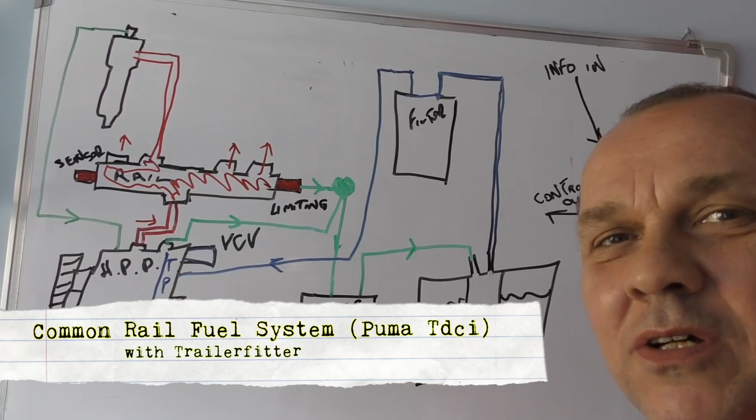This one is about common rail, specifically the Tdci type system used in the Puma engines. There are two different Puma engines, the 2.4 and the 2.2. They have differences, but they're minor.

One has a transfer pump in the high pressure pump, and the other has a fuel pump in the tank. Anyway, what I want to do is explain the common rail more than anything, and we'll introduce the Puma stuff in as we go.

I'm not really familiar with the 2.4 and 2.2, but we've got some in the workshop and we do get problems with them. The major one is this tank pump.

It will come up with a VCV fault, and it won't be that at all. You'll have a lot of shit in the tank pump and it won't be pumping properly. It's just something to remember.

This is not a diagnostics course here. This is just a fuel system overview.

As with the 300 Tdi EDC, it has a brain. As with the TD5, you have information coming in from the engine.

The difference now with common rail is monitoring the exhaust emissions, which monitors the pressure differences in the exhaust, because it wants to know that it has full flow there and it's not blocked up with soot.

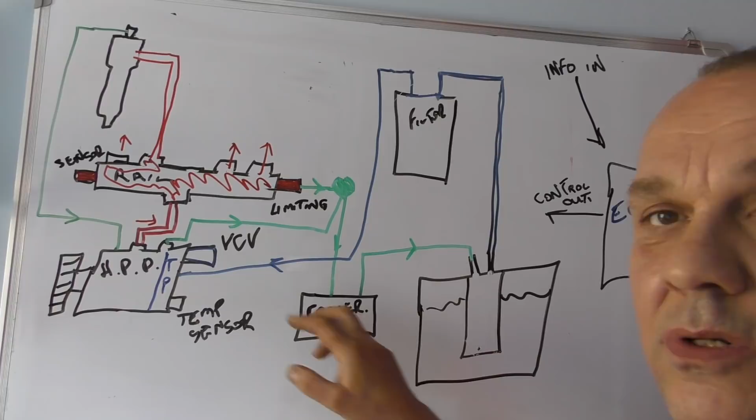What it has in the high pressure pump is a transfer pump, which sucks it all the way through to here. The later 2.2s have a tank pump which pushes diesel through, and it's a lot better.

If you have issues with leakage here, it's sucking, isn't it? So that will cause you a problem, whereas if it's pushing, it will leak and you'll see the leak.

Basically what we have is from tank to filter, and then it goes to the high pressure pump. That's a supply too.

Now what the high pressure pump does, it's not like an injector pump. All it does is provide pressure to a common rail. So we have fuel coming in.

It's controlled by the VCV, which is a volume control valve. You have a temperature sensor here as well, which sends information to the ECU so it can adjust the volume coming into the pump.

Whether it's got a transfer pump or not, it has a leak back. Leak back can also come from the injectors to the pump, out to the common T-piece, to a cooler. We'll get to that in a minute.

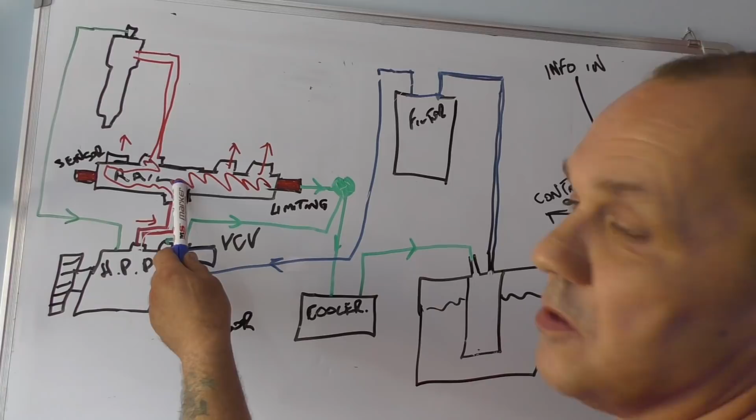So your high pressure pump, HPP, is designed to just deliver pressure to the common rail. Now the common rail, as it says, is a common rail.

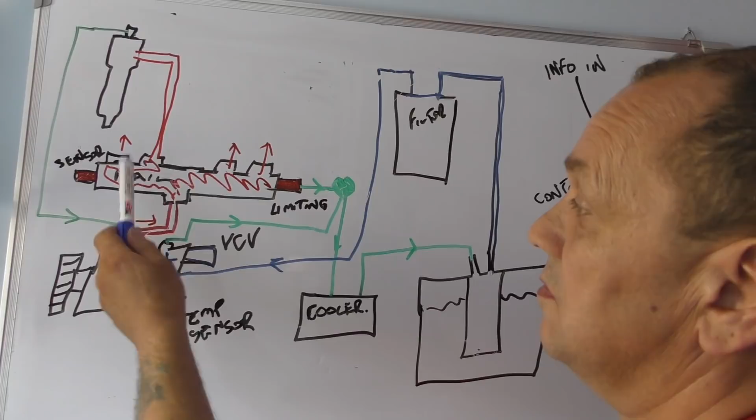That means it will provide constant pressure to four injectors. It has a sensor here, your pressure sensor, which senses what pressure is in the rail, and it also has a limiting valve here.

If the rail pressure is exceeded, as a safety it will blow off and let back. And there's something you should know, if this comes up with a DTC to say that this has blown off, you've got to change it.

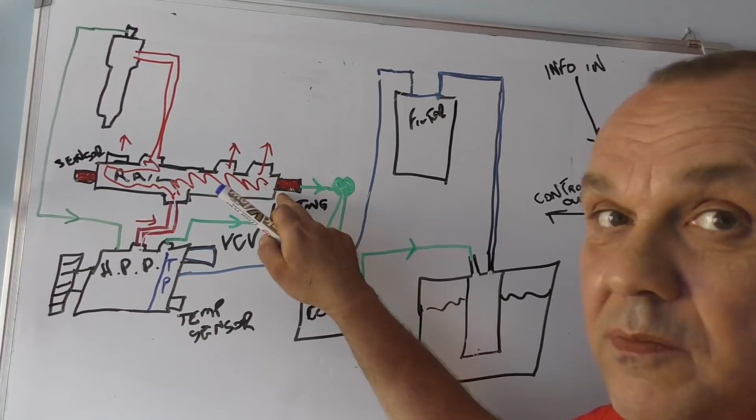According to the manual. I've not had one blow off, nor have I known of one anyway.

So what you have is your high pressure pump converts low pressure diesel into high pressure to the rail and then off to the injectors. Now the rail is a fairly stable pressure.

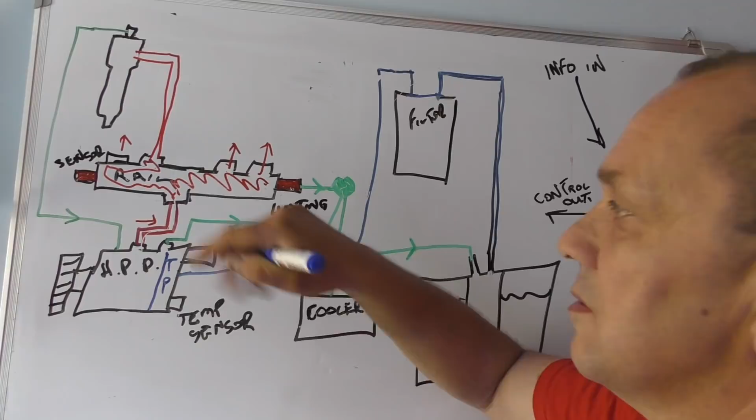The pump's always adjusting its pressure to keep this pressure right. There is quite a bit of difference in pressure depending on the speed you're going. So what it's doing, it'll...

deliver pressure to the injector, and then the injector is controlled, there's a solenoid in here, by the ECM. Now these can fire off very quickly. I think there's five squirts on this one.

You have pre-squirts, you have a main burst, and then you have a post burst, and this is to give you power and to clean up the burn in the bore.

You also have a leak back, which goes back to the high pressure pump on this one. Some don't, they go somewhere else. Leak back should be very minimal, there shouldn't be much there.

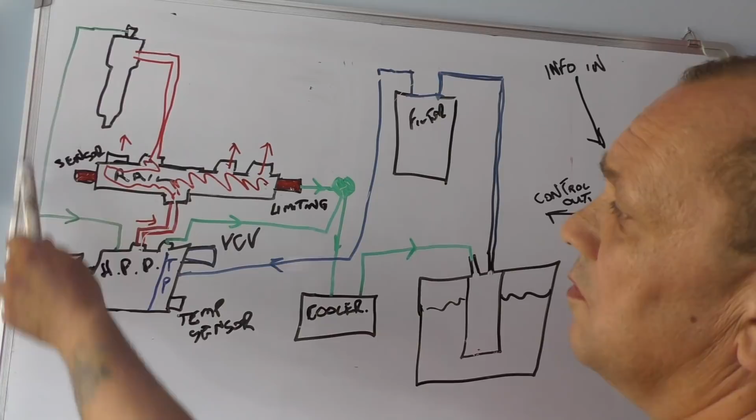Basically what happens in this system after that is the diesel leak back will go to a fuel cooler and then back to the tank.

Basically that's it. That's just the fuel system as it is.

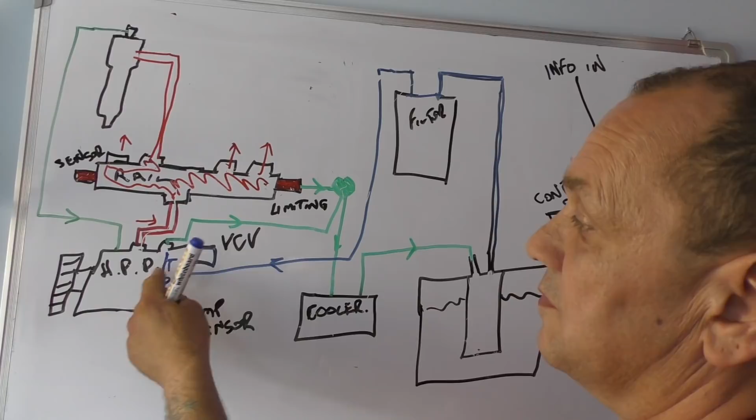The volume control valve, now that is an important element. That is controlling how much volume comes into that pump. The high pressure pump itself is controlled by this via the ECM.

We'll leave it there for now. Obviously that is how it works, and it's that simple. Yeah, it gets more and more complicated when you need to diagnose things.

Alright, what I'll have to do is try and scrounge a Puma from somewhere eventually, to show you how to diagnose this system.

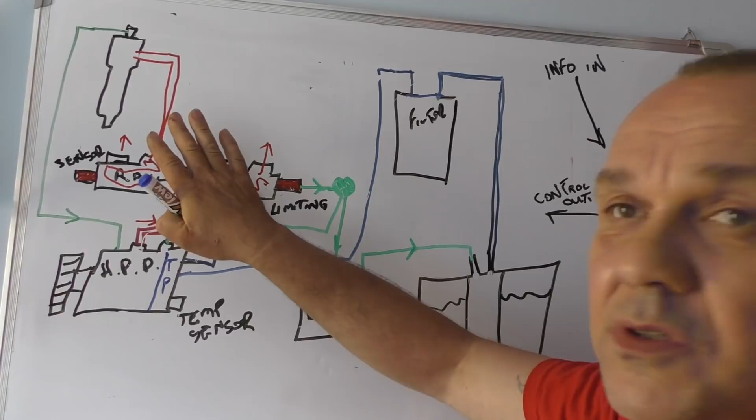On a high pressure system you never crack the injectors off. When the pressure is in the rail, just let it sit for like half an hour. Once you've undone these unions, the high pressure pipes on the rail, don't use them again because they're one use only. I know people fit them again, but it's not exactly right. They leak, they cause problems, people try to cram them down even more, and then they ruin the olive fittings or the threads on the common rail.

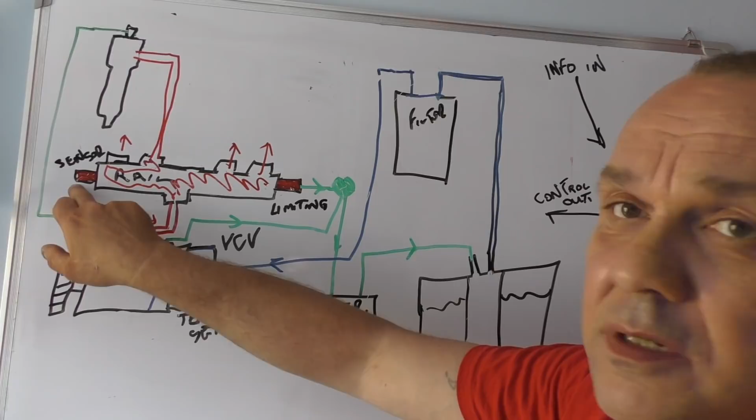This block is cast iron, you see it, it's the rusty bit on the engine, and this will hold extremely high pressures. The sensor senses the pressure and sends it to the ECU, which can then work with the high pressure pump to control the volume going into the common rail. As I said, this is a constant feed to each of the four injectors in this case.

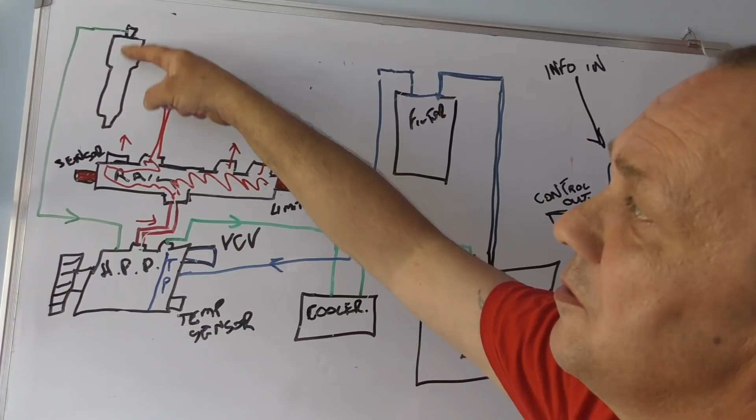The pressure's there, the solenoid drops off and gives it squirts. For instance, with diagnostics, if you have four injectors and one that's leaking off quite dramatically, that'll be the injector that's knackered.

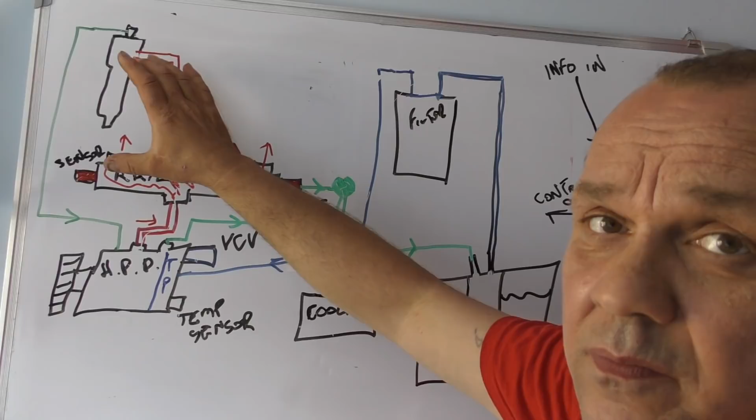These aren't the best. These Delphi ones, they're not brilliant. The later Puma 2.2s have got piezo injectors, they're a little bit better, but they still can fail. You can have more leak back than you really want.

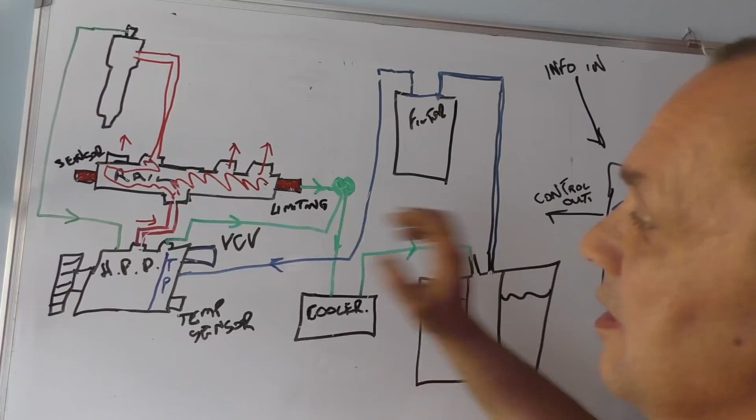What else can I say about this? The diesel coming out of this will be quite warm. You keep it cool, the diesel will come to a certain viscosity. The temperature sensor here is determining, like I said on the EDC type, the quality of fuel coming into this pump. The ECM can then adjust this accordingly and adjust the injection accordingly.

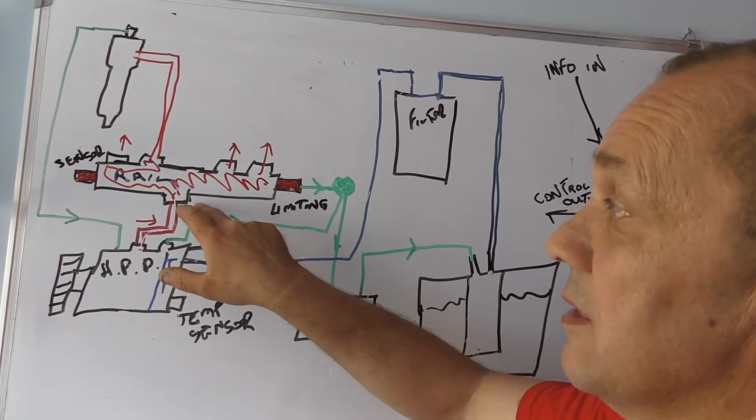These systems, this transit engine, for want of a better word, because that's what it is, a Ford engine, a Duratorq engine, you'll find in quite a few different vehicles. It's not just Land Rover and Ford Transits that have got this. The Ford Ranger's got it. I think some of the Peugeots have got this system as well, as far as I'm aware, though I've not seen it. However, you can set these at an injector learn.

They will learn, they will learn the system. You basically wipe this, reset the ECM. The injectors will then learn, and then it goes through a process when you're doing a set with a scanner.

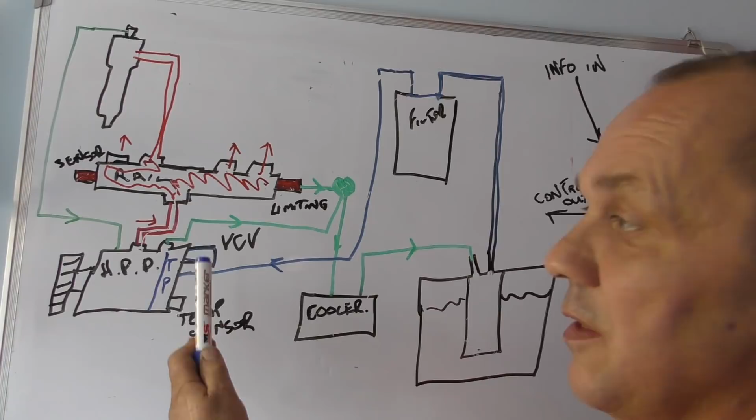This sort of system, you do need scanners with them for diagnosing faults. There are some simple ones, and usually it's something like a filter blocked. Like the Land Rover one that's by the wheel arch, that's a really stupid place to put it.

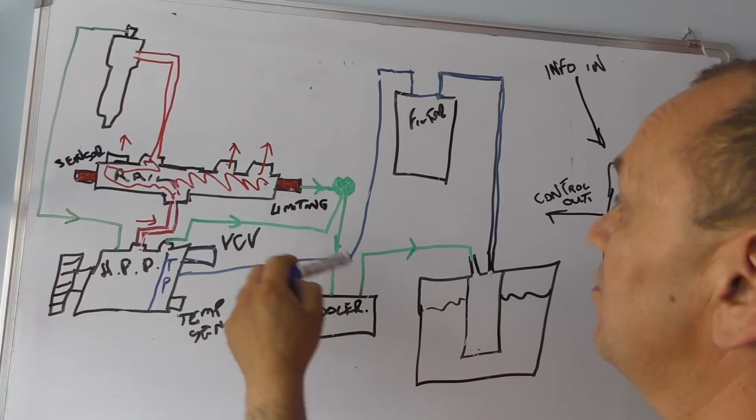This pump as well, on the 2.2s, we've had constant issues with them, especially with bad quality fuel that's had sand and water in it. It's screwed the pump up very, very quickly. You wouldn't believe how misbehaved this whole system will be if it's not delivering fuel properly.

That takes experience and a bit of thinking about, because I had one of these that was telling me it was a VCV valve, volume control valve, so I changed that out, which is about £100, and it did nothing. So I had to go back to the drawing board. We actually took the tank off and had a look at the pump, and that was full of sand. It was still delivering fuel, but not at the right pressure, and that makes a big difference.

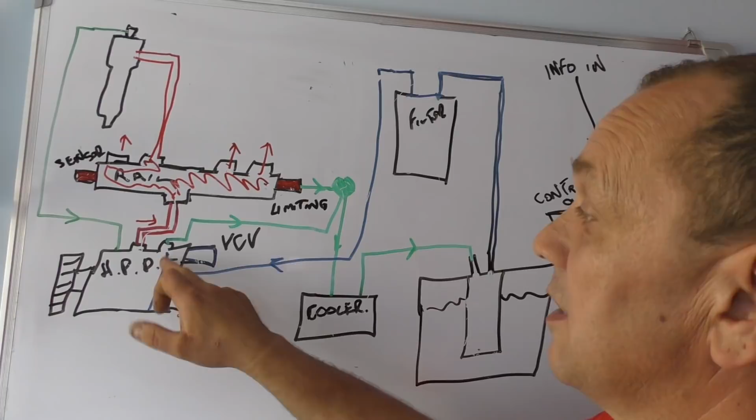Now, at the time we had no data. Land Rover wouldn't supply us the data for the delivery of the low pressure side. They just wouldn't let us have that information.

On the line here, there's a little Schrader valve which you can take a pressure reading from this pump on the 2.2, to read what pressure you've got coming out of that pump. Even if it looks like it's gushing out, it might not be enough pressure. It's not the volume, it's the pressure that's important.

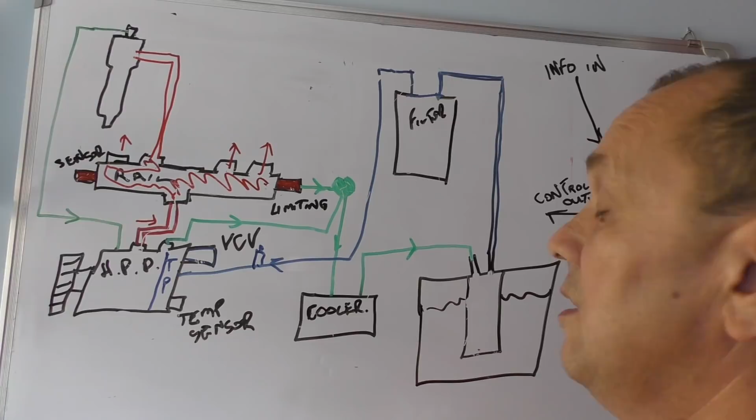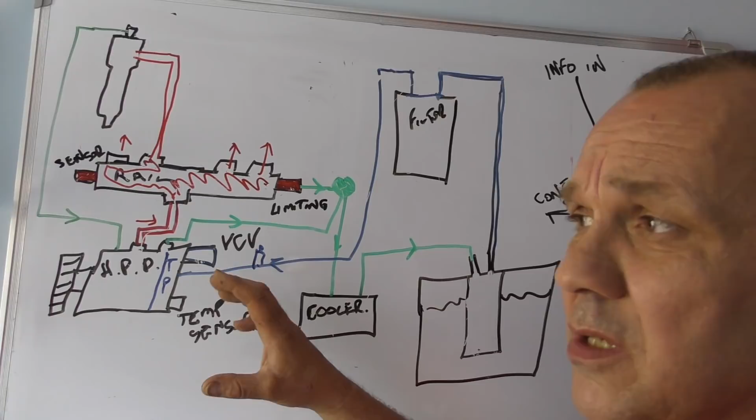So anyway, I'll leave that there for now. There's a lot more to this. You've got your induction side on each of these engines with your turbos, and with the later common rail ones, you've then got the exhaust to consider. I really need to describe a bit of how all that works, because with your emissions controls, that will affect the running of this if the ECM isn't happy with your exhaust, if it's blocked or whatever. DPFs, people are having a lot of problems with if they start to get sooted up, so that's a subject in itself. I hope you're happy with this.

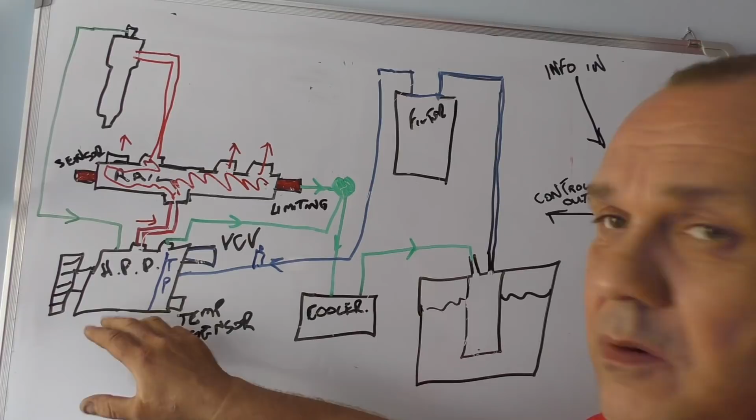The only thing I want to say with this high pressure pump, it's not timed like your injection pump. The timing doesn't have to be perfect on it. It's chain driven in this particular engine. You time your engine up, put it on, bang, away you go. You don't have to adjust this to any type of lift or anything, because it's not sequence timed, it's just providing pressure to there. So anyway, that's that in a nutshell.